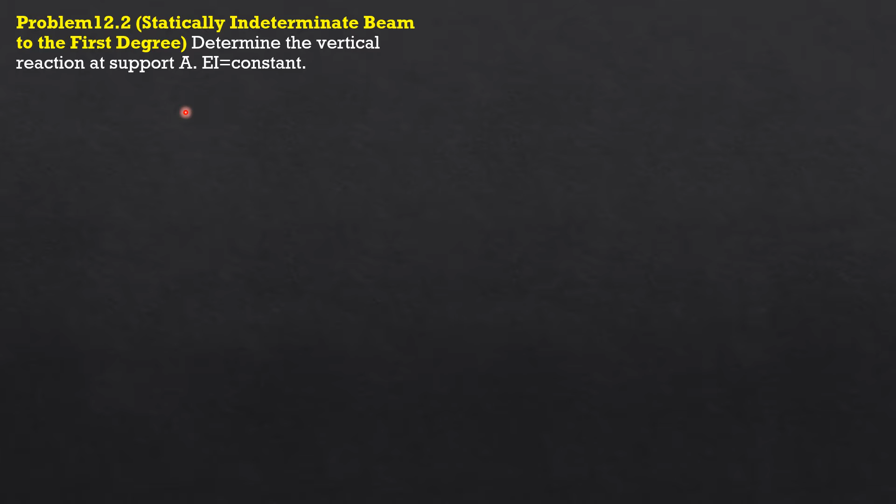Here's a problem on statically indeterminate beam to the first degree. Problem 12.1 was solved by the same method of consistent deformations, and I applied double integration method there. So here I'll apply area moment theorems.

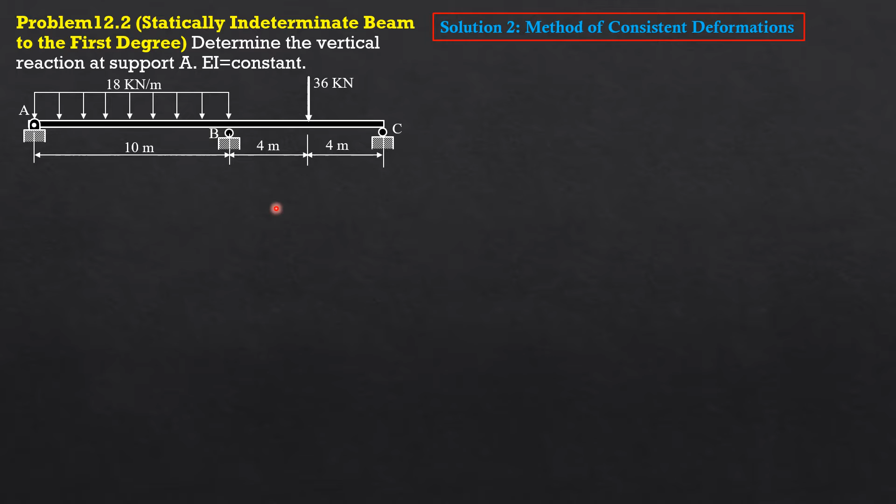So this is statically indeterminate to the first degree, so I select reaction at B first as the redundant. I remove support B so that it will deflect freely, and we can solve for the deflection under B, and it becomes determinate beam. So this is by area moment theorem, but the method is method of consistent deformation, or the force method.

So this is now the beam when the redundant or the support at B is removed. It will deflect, and the deflection under B is denoted by delta B, and the reactions may not be important. I just draw the moment diagram by parts. I select A as the moment center.

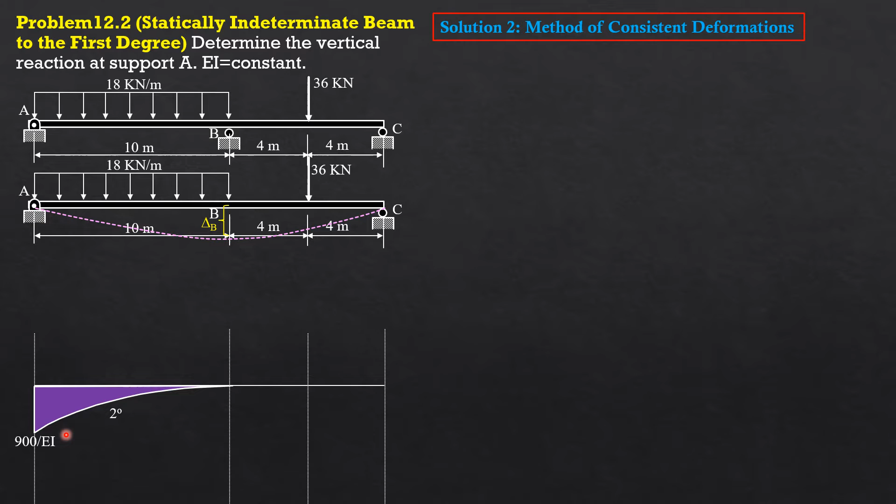So due to the 18 kilonewton per meter load, 18 times 10 times 5, second degree, that's 900 over EI. Then 36 times 14, that's 504 over EI. Negative 900 and negative 504 is negative 1404. Therefore, the moment due to the reaction at C should be 1404 over EI as shown.

So therefore, the reaction at C is 1404 divided by 18, the span. Because reaction times 18 is 1404, so reaction at C is 1404 over 18. That is important later. So it is 78.

So this is the tangent at C, and we call this deviation of point A relative to the tangent at C. If the figure is correct, then we expect deviation of A relative to C positive, because A is above the reference tangent by principle. So EI, deviation of A relative to C, is 1/2 of 18 times 1404, moment arm 18 over 3 or 6.

Then minus moment of this area with respect to A is 1/3 of 10 times 900 times 10 over 4, the moment arm. Then minus the moment of this area, 1/2 of 14 times 504 times 14 over 3. So solving for deviation of A relative to C, it is positive, so that's correct because A is above the reference tangent at C.

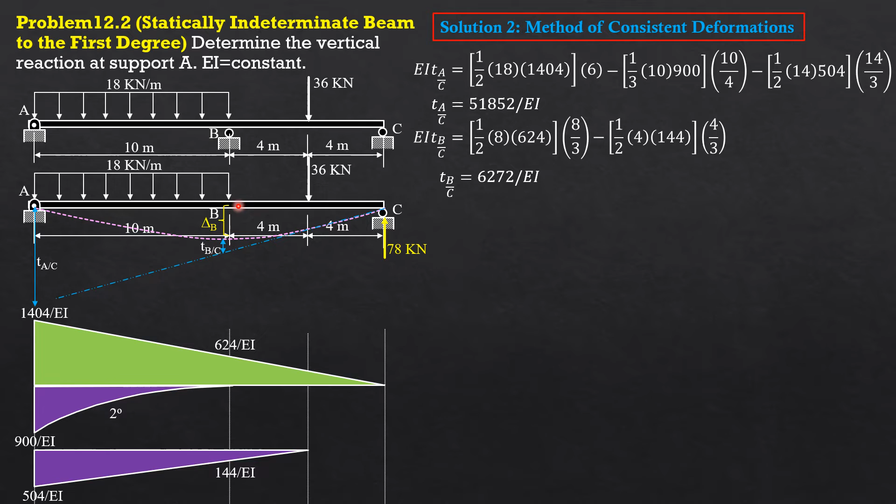So deviation of B relative to C, if that is correct, that's positive because a point on the elastic curve is above the reference tangent at C. Then by similar triangles, delta B plus deviation of B relative to C, which is 6272 over EI, as to 8 equals deviation of A relative to C, which is 51852 over EI, as to 18 by similar triangles.

So from there, we can compute delta B, and it is below the horizontal axis of the beam, so it is downward or negative. So 50320 over 3EI, just like before.

So next, we apply a unit upward load, and the corresponding deflection above B is denoted by FBB, the flexibility coefficient FBB. And of course, the reaction here, though not needed, is 1 times 8 over 18, so 4 over 9 downward, so this is 5 over 9 downward.

This time, we select C as the moment center. So moment of the 1 kilonewton load, 1 times 8 is 8 over EI. Then this should be 8, moment due to this reaction. 4 over 9 times 18 is also 8 over EI because the moment at C is 0.

Then we evaluate, we draw tangent at A, and this is deviation of C relative to A. If this figure is correct, then this deviation of C relative to A is negative because C is below the reference tangent at A. So EI, and call that deviation of B relative to A, which is also negative if the figure is correct. So this is 40 over 9 EI, 4 over 9 times 10, so 40 over 9 EI.

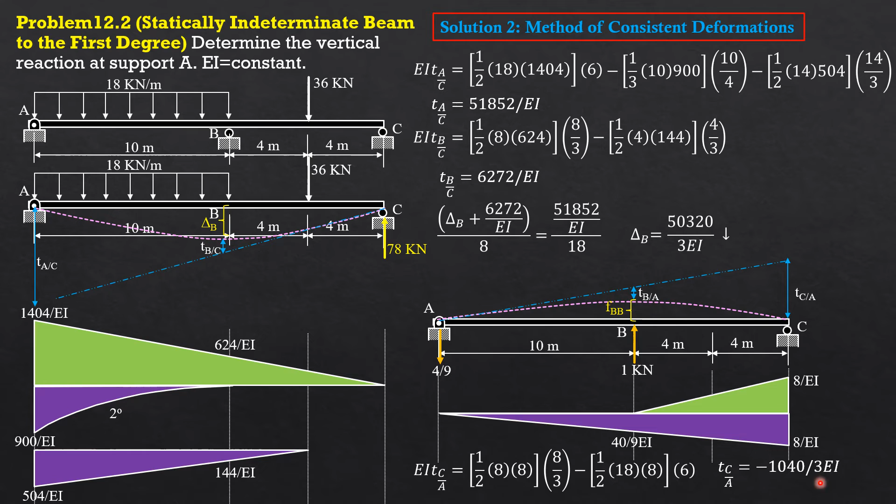So EI deviation of C relative to A is 1/2 of 8 times 8 over EI times 8/3, then minus the moment of this negative area about C is minus 1/2 of 18 times 8 over EI times 6. 18 over 3 is 6. So deviation of C relative to A is equal to negative 1040 over 3EI as expected because C is below the reference tangent. This is below, so that's why it's negative. So remember that value. We need that on the next slide.

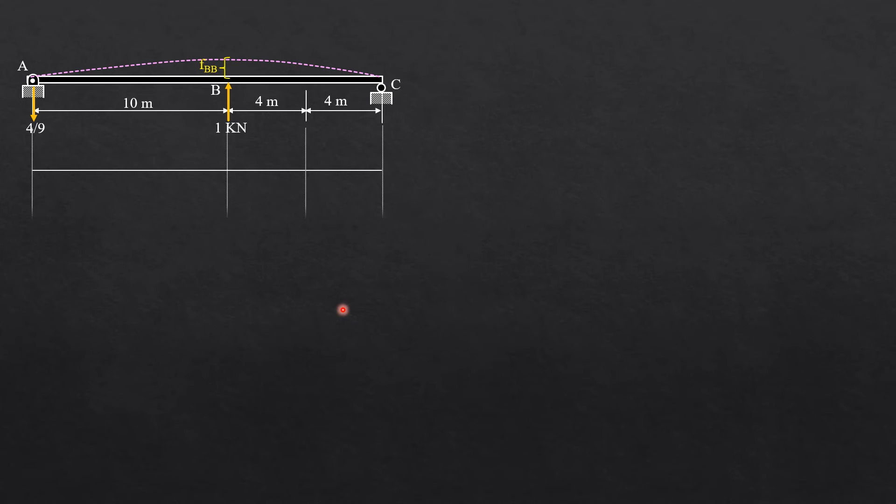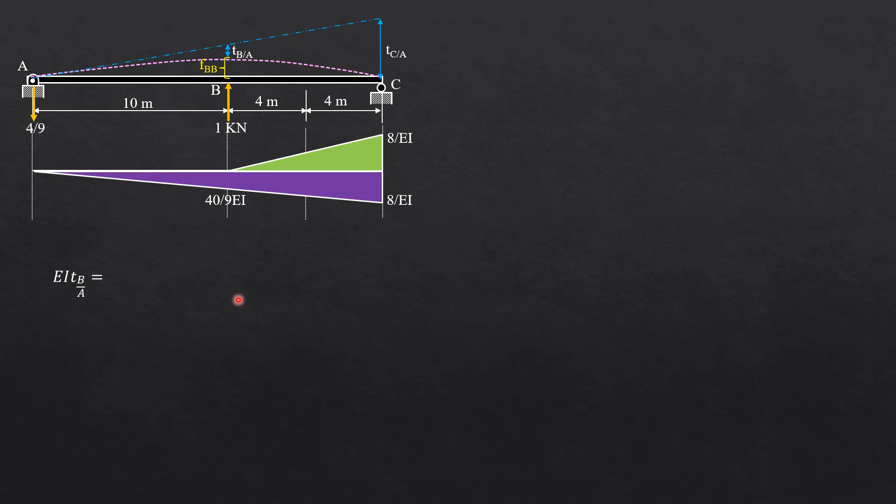So let's have the same figure repeated here. So EI deviation of B relative to A is moment of area between A and B with respect to B. And it is negative because the area is negative. So negative 1/2 of 10 times 40 over 9 times moment arm 1/3 of 10, 10/3.

So deviation of B relative to A is negative 2000 over 27 EI. Then, by similar triangles, to solve for FBB, we'll just treat everything as positive. This is positive, this is positive, because the figure is clear.

So FBB plus deviation of B relative to A, which is 2000 over 27 EI, is to 10 as 1040 over 3 EI, deviation of C relative to A in the preceding slide, is to 18 meters. So FBB can now be computed, and it is 3,200 over 27 EI, just like before.

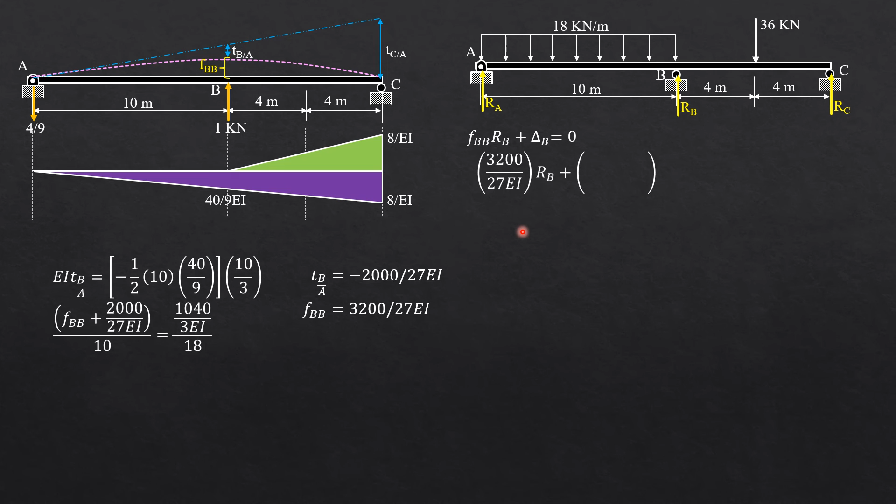So FBB times RB plus delta B must be equal to 0. So call that RA, RB, and R sub C. Take note that the objective is to solve for RA. So FBB RB plus delta B equals 0. So substitute 3,200 over 27 EI RB plus negative 50320 over 3 EI equals 0. So from there, RB can be computed, 141.525 kilonewtons.

Then considering the entire system, summation moment about C equals 0. So R sub A times 18 plus RB 141.525 times 8 equals 36 times 4 plus 18 times 10 times 13. 5 plus 8 is 13. So RA is 75.1 kilonewtons, just like in the first problem.

Then for your part, I want you to solve this in the same manner and verify that the answer for RA is equal to 125 over 18 kilonewtons exactly, or 6.944 in decimals. So that's it for this second way, and I hope that you were able to understand the solution and the process.